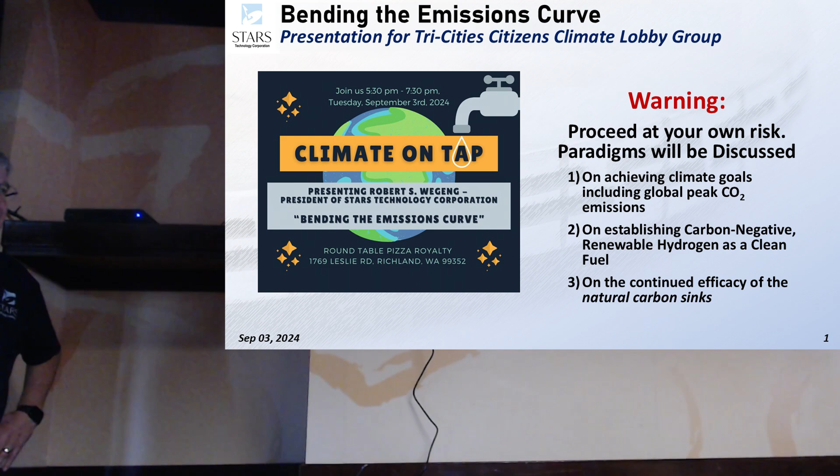Thanks very much. I commented earlier that I need to tell who I am now, so you'll know why I'm qualified to talk to you, so no one will ask the question at the end, why did you think you were qualified to come and talk? That would be embarrassing. But I'm saying that to say I want to have some fun with this talk. This is the third time I've talked to this group before. The first two times were before the pandemic.

Once it was at the Emerald of Siam. Some of you were here for that. The next time was at, was it called Paper Street or something like that? The Paper Street Brewery, the pub that was there. Yeah. So I gave another talk there too. This talk is a little different than those first two talks. At that time I was talking about clean energy from a conservative's perspective. Some of you know that I was a precinct committee officer in the Benton County Republican Party, and I may be one again next year, and then again it may not be. It may depend upon how some things go.

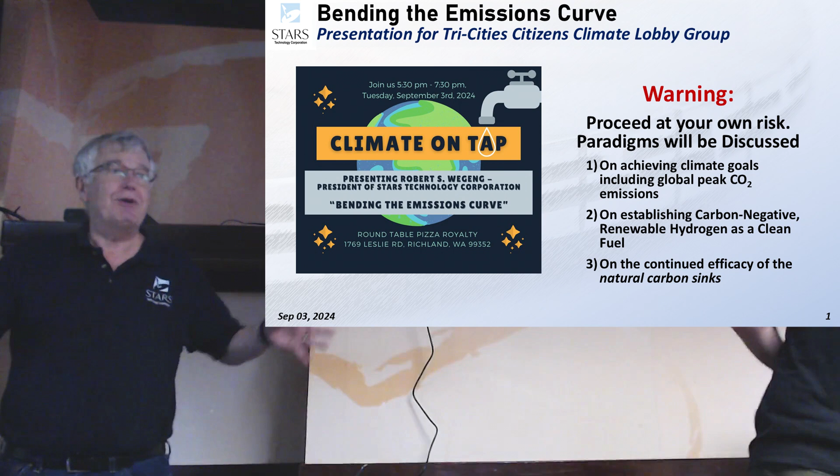I want to provide a warning. This is for mature audiences. This is not for people that are skittish or things like that. We may break some things during this presentation. We will definitely be talking about paradigms. We may break some paradigms. We may be dancing on top of the shards of some paradigms by the time we're done. Paradigms that are false need to be exposed so that we can make better decisions about how to do things. And developing paradigms that work so we can teach them also matters a lot too.

So to a large extent, this talk has to do with paradigms that relate to the next three things. One has to do with the title of this. When I was asked about a title, I said, how about bending the emissions curve? Because I kind of knew that I would want to talk about that. I also knew, because I'm with STARS, that I would want to talk about things STARS is doing on establishing carbon-negative renewable hydrogen as a clean fuel. That's related to paradigms too. And then the third thing I'm going to talk about is something that Steve and I have spent some time on: the continued efficacy of the natural carbon sinks. So I'm going to talk about all three of those things.

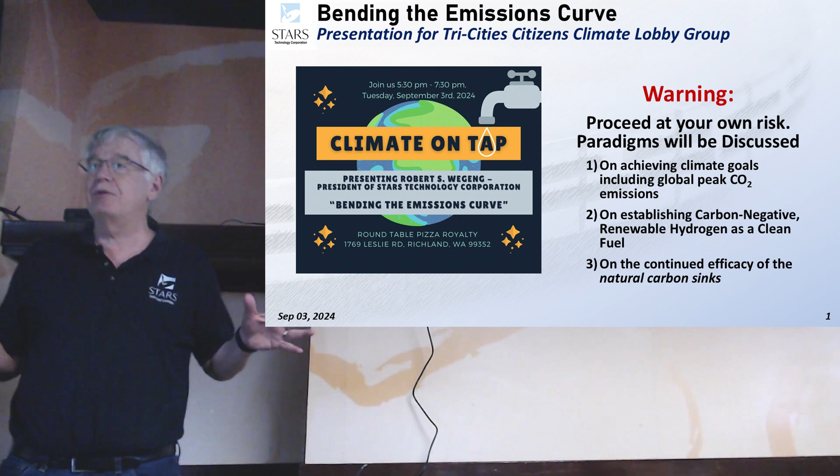And again, I hope to have a lot of fun. Hopefully, I will continue to occasionally make you laugh. Sometimes it'll be at me. Sometimes it'll be at things I say. Sometimes there might be stuff on this.

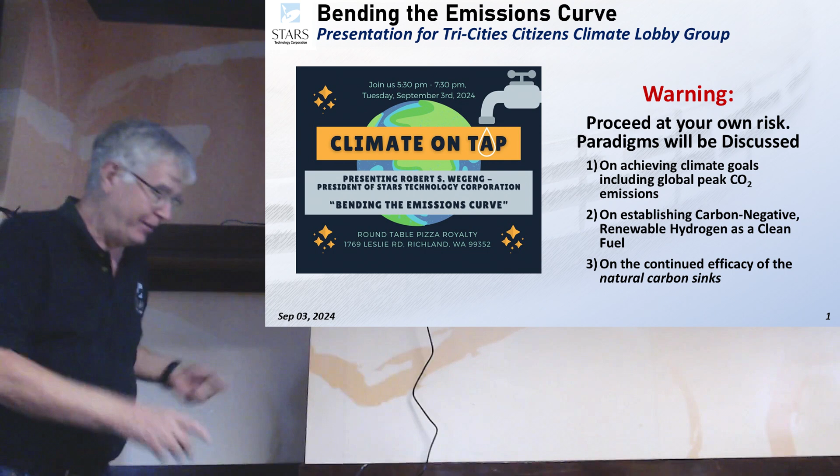But there will be an occasional item simply to remind me, oh, at this point, make sure you say this or make sure you say that. It may not be obvious to you that that's what it was for. I was asked earlier, if I had a hammer, did that mean that we were going to sing or that I was going to have music playing with this? And the answer is no. That was to remind me that I think of this group as an advocacy group.

I was born in the 1950s. I know who Peter, Paul, and Mary was. I think a few of you do too. You knew who they were.

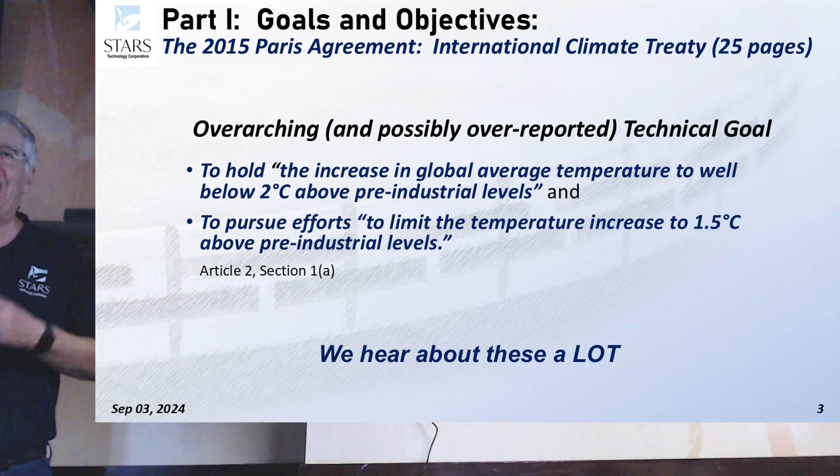So I now want to do a little preamble. Something about goals and objectives. I was an engineer for a long time, and projects for a long time, and organizations for a long time. I kind of like when somebody came up and said, you should have high-level goals and a series of objectives under them that you can measure so that you know when you attain the goal. The objectives should sum up to say, now I met that goal.

I like that approach. I view the temperature-related things in the Paris Agreement as being the high-level goals. And you guys probably know, my PDF copy of the Paris Agreement is 25 pages long. There are lots of words in it, but we only hear a little bit about some of them. So anyway, from about 2 or 3 pages in, there are 2 goals that we hear about often. I refer to these as overarching and possibly over-reported goals. The first one is to hold the increase in global temperature to well below 2 degrees C above pre-industrial levels. I would be amazed if people in this room didn't know about that goal.

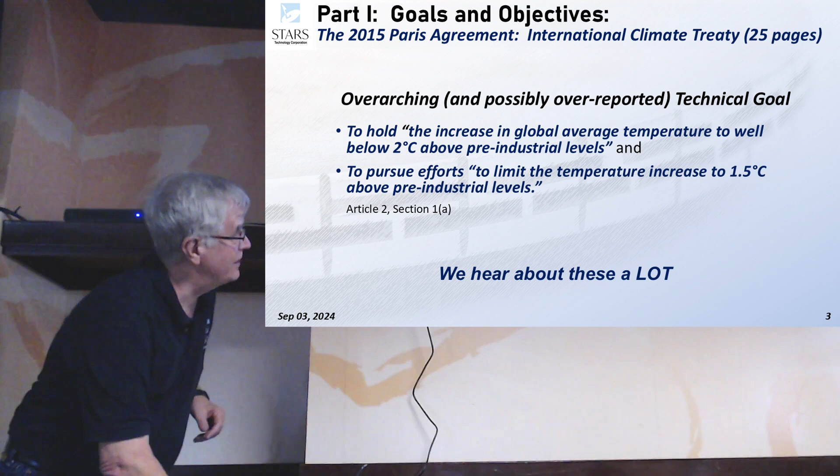I would be even more amazed if they didn't know about the second one, which is to pursue efforts to limit the temperature increase to just 1.5 degrees C above the pre-industrial levels. And again, I think this is over-reported to a certain extent. We see this practically every day. There's always going to be an article in the news or in the trade journal or something where they talk about our problems with accomplishing, particularly the 1.5 degree C goal.

And they often report that scientists have told us that at 1.5 degrees C, the Earth will start to experience irreversible climatic type events, which of course isn't really what climate scientists have told us. But it is the popular thing to talk about on the news, and it helps people continue to stay on the news stories so that they get to see the commercials that people paid to have put on the show. We hear about those a lot.

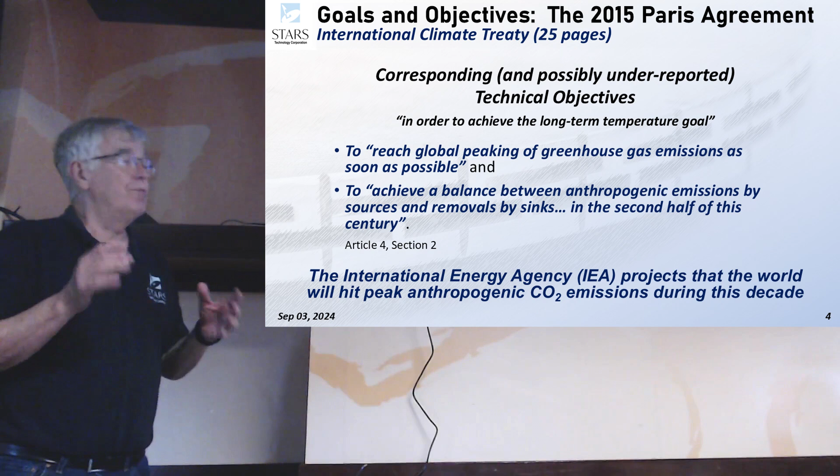But now I want to go to the objectives part, and this is where I think there's stuff that's really valuable, but possibly underreported. Technical objectives to achieve the long-term temperature goal. That's in the item, a couple of pages past those first. So 2 objectives. One is to reach global peaking of greenhouse gas emissions as soon as possible. I'll come back to that in a second. I want to bring up the second one. To achieve a balance between emissions by sources and removals by sinks in the second half of the century.

Now I said I'd like to see objectives that are measurable. It would be a little better if the first objective didn't simply say as soon as possible, but gave something more concrete so we could see how we're doing. And the second one, at least they gave a little bit more. They say in the second half of the century.

I wonder if the authors thought, will that be like in the last quarter of the century, after 2075? Will it be between 2050 and 2075? But they surely didn't think our goal is 2030, or our goal is 2040, when they wrote in the second half of the century. Roger, you asked me before, is there going to be good news? Maybe, on these points, maybe.

Now, I want to mention, I'm kind of jumping to the first item, this is like getting to the end of the story first. The International Energy Agency projects that the world will hit peak anthropogenic CO2 emissions during this decade, perhaps as soon as next year. Almost 3 years ago, they made that announcement. They said that the war in Europe put great pressure on energy replacements, and that has made a big difference in the production of renewable energy and other things too, so that they were now projecting, again almost 3 years ago, that we could hit this peak emissions, that's the first of those two underreported goals, perhaps this decade.

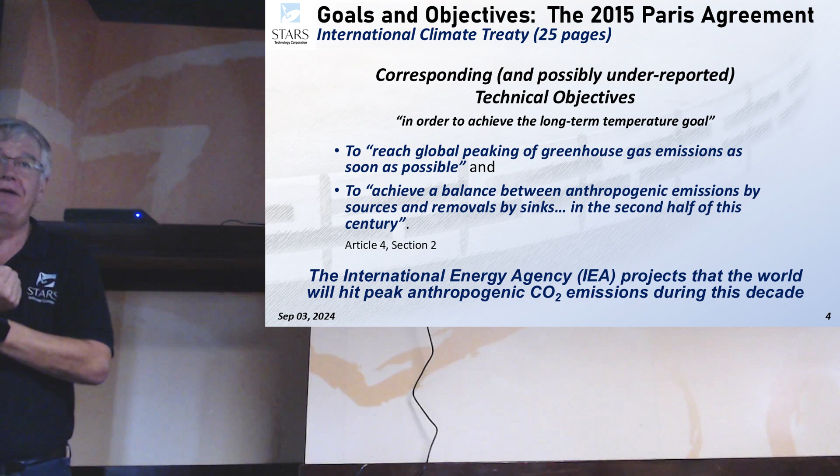I'm not talking about positrons and whether they go backwards in time like Richard Feynman suggested. I'm definitely not covering the many worlds view of quantum mechanics. And I'm not talking about who should be the next president. In fact, I've learned that I shouldn't be the one telling people who the next president should be. Important things like that should be communicated by my wife.

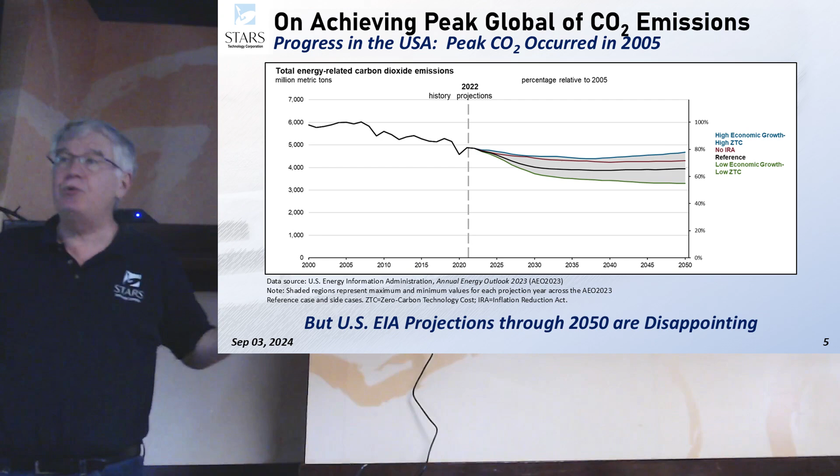But anyway, the IEA says that. So I want to talk about this for a couple of slides. Again, this is that first item about reaching peak CO2 emissions. Again, the good news from the IEA was that. I'll talk more about it in a moment. But first I want to say, what's the progress in the USA? Well, again, an underreported item is the USA hit peak CO2 emissions in 2005, maybe 2006, but the USA did it years ago. We've since shut down over 300 coal-fired power plants, over 300 coal mines.

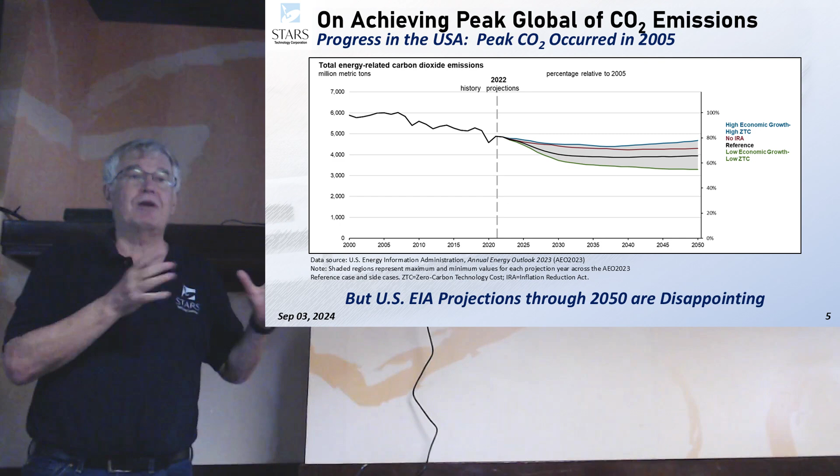We've done it through a combination of things that include shifting some power from coal to natural gas, that include solar and wind generators as well, that include some batteries in places too. But we have substantially reduced our CO2 emissions.

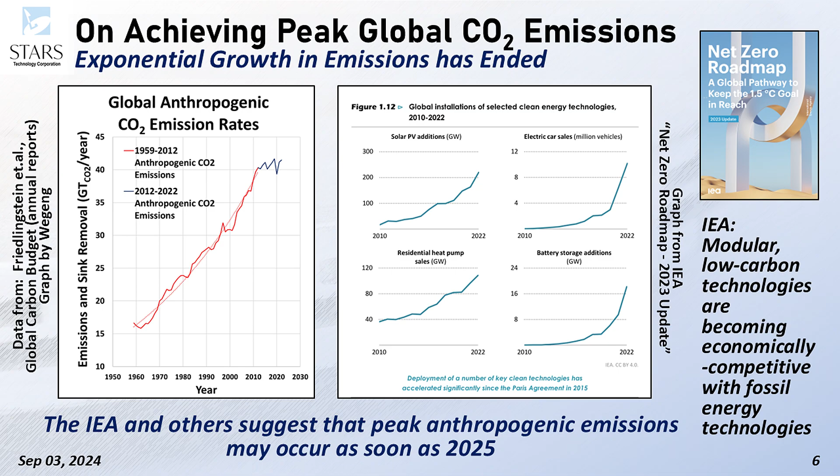We'll show that now. So this is what the Energy Information Administration from the US put in a chart about a year ago. This is from their Annual Energy Outlook 2023. I don't think they came out with one for 2024. When I looked for it today, I found a website that said, stay tuned next year. So they were saying, we'll have a 2025. I think maybe they didn't do it 2024. But this is the chart they produced. And it has what I was talking about.

In about 2005, we had peak CO2 emissions. And again, this is CO2, not CO2e, but CO2. And since then, it's been declining. Now, their projections a year ago in 2023 did not include things people talk about, which is, can we get to zero in 2050? They say they were confused about the Inflation Reduction Act and its provisions. So they have one scenario without it, they have a couple others, but they basically said stay tuned for the next time around for what we think that will do.

So, but I will certainly say, my comments on this is that their report certainly was disappointing. If we really want to get much greater emission reduction, they showed emission reduction slowing down. And we all know we can do better than that, and we know we need to do better than that. Price on carbon. That's one approach, but I would say there are other things too, and I'll talk about some of the others as well. Okay.

Yeah, don't be a heckler.

Now, worldwide, I said before that the IEA has said we think we can hit peak emissions during this decade. So now I put up a chart.

By the way, Mickey had said don't be too technical. So if this is too much, then please avert your eyes. Again, this is mature audiences only. But I produced this chart. There are only a couple of charts in this that I didn't produce. I'll just let you know. So that means it's not too technical. If it's not too technical for me, then you guys can handle it too.

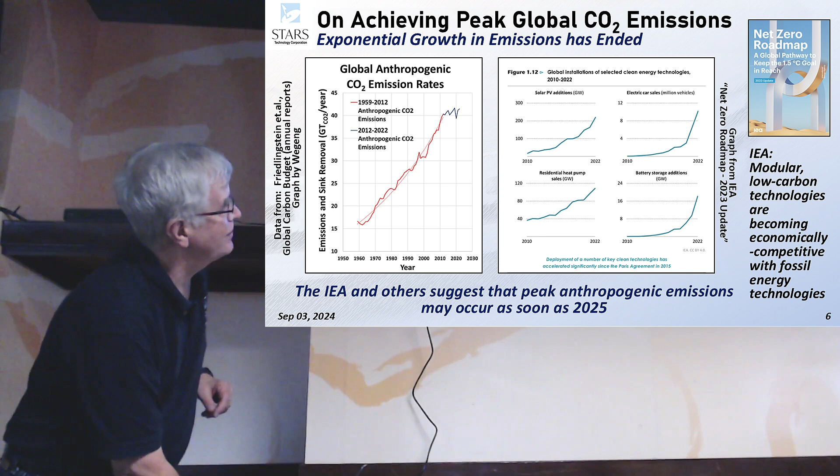This is battery storage. What they're basically saying is that modular systems mass-produced, as they achieve greater and greater mass production rates, get cheaper and cheaper. We knew that to be true already in the USA, but they're saying it's happening so that now we are getting modular low carbon technologies out there that are economically competitive with fossil energy technologies. Now, I think we all know that as they become cheaper than fossil energy technologies, people will tend to prefer the clean energy technologies instead. So that is a paradigm notion then from the IEA about how to reduce carbon emissions. We have to deliver technologies that are economically preferable and they cause emissions to fall.

And I want to make this point too. This is about paradigms. The world is departing from the IPCC, the UN's Intergovernmental Panel on Climate Change, from their business as usual scenario. And the stuff I've seen coming out of them as they prepare for their next round is a recognition that they need some other kind of standard, because we're not on a path now where we keep doing the exponential growth up. Hopefully we don't take it again.

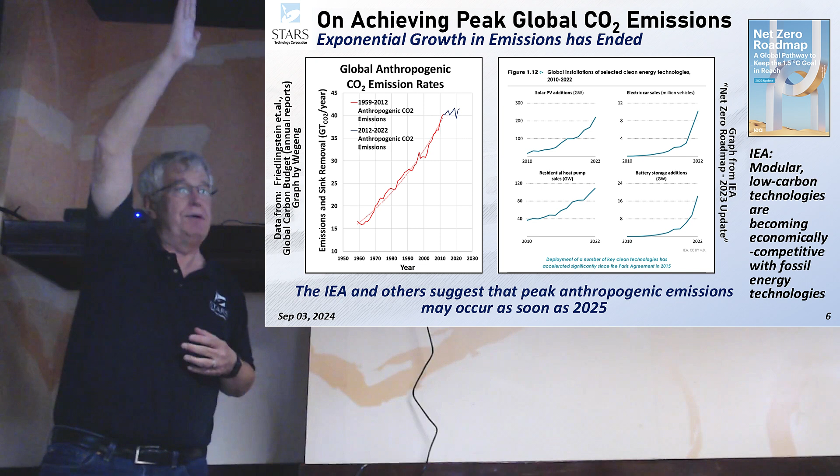But if we're not on that path, then we don't need to be comparing ourselves to scenarios where we're at 1,000 parts per million in the atmosphere or 1,200 parts per million in the atmosphere. Instead, we're on a path where we could definitely go less. And by the way, it's up to us to make sure that happens. So while, Roger, there's good news in this talk, the bad news is it's still up to us. We still have to work.

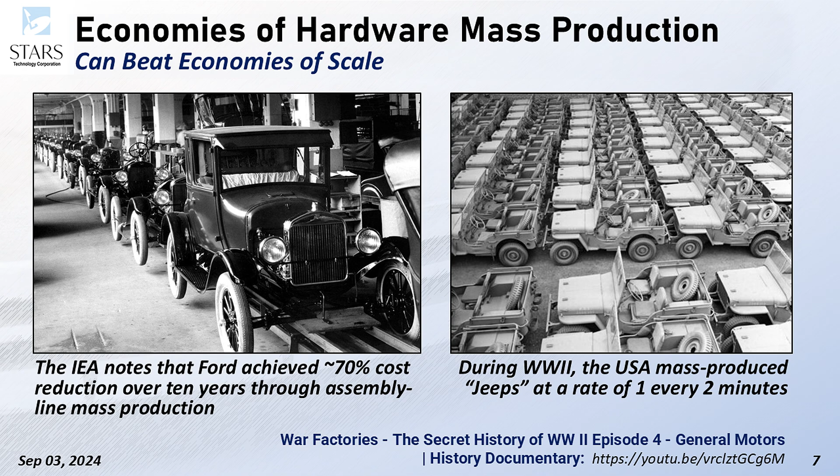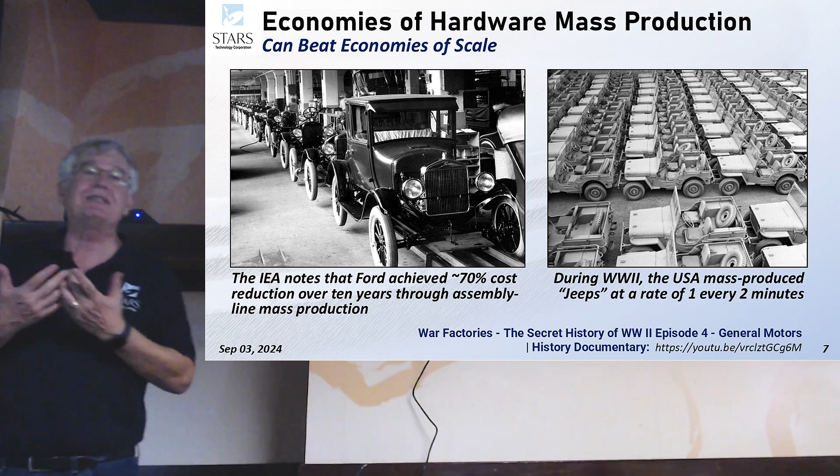Now, I wanted to say something about mass production. You guys remember there's a question at the end. I'm not going to tell you the answer anymore. It might have to do with this. So I'm going to show first Henry Ford's mass production. As a mechanical engineer, I studied that. And it fascinated me that over actually about 2 decades, Henry Ford transforms transportation in the USA immensely.

Well, anyway, so the IEA pointed out that Ford achieved 70% cost reduction over 10 years through assembly line mass production. But Ford started off, as the subtitle says, saying, I want to do a mass-produced automobile. When Ford began, everyone knew that only a rich man could afford a car. They were thousands of dollars each, and that's the start of the 20th century when $1,000 was a whole lot of money. Ford said, if I can design a car for mass production and get the much better efficiency of labor through things like assembly lines, then the average family will be able to afford a car.

This is part of why, and I showed these pictures, like a comedian, I don't want to tell the same jokes all over again. I showed these pictures a couple of talks ago. New York City in 1903, it was Easter Sunday, black and white photos. It's hard to find the car in the photo. It's loaded with horses and buggies. 10 years later, same place. It's loaded with cars. It's hard to find the horse. That only occurred because in that 10-year period, it went to a circumstance where if you owned a horse and it was time to replace your horse, you were economically better off to get a car.

We want to think that way, by having clean energy technologies that are better solutions than the fossil energy technologies. We change the planet whether the planet wants to change or not. Workers were able to buy the cars they were making. Yeah. So now, this one, I like this one a lot. This is from World War II. In World War II, the USA mass-produced Jeeps at the rate of 1 every 2 minutes. They came out of the factories in the crates, ready to be put on ships and taken to Europe.

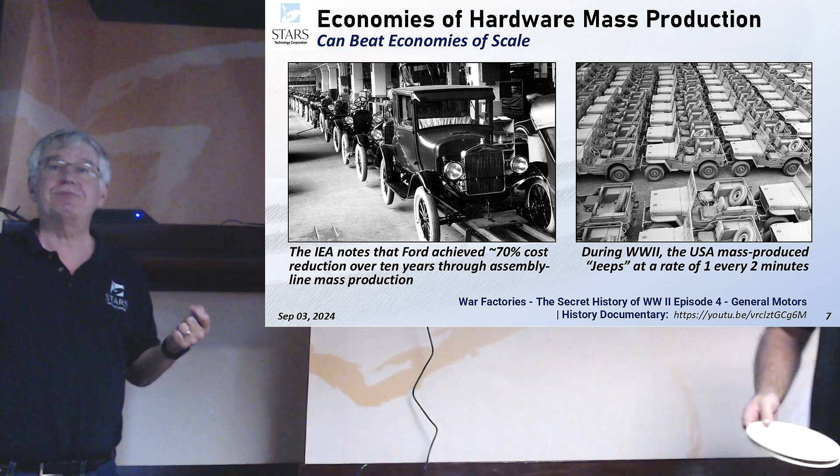There's a really great YouTube video. I put it here at the bottom. It's part of a series on how America's manufacturing might won World War II. And it talks about how we changed out things in Detroit and elsewhere. How they changed out assembly lines for mass production, and how they changed the design of things like machine guns and, well, not so much jeeps, I think jeeps were new then, tanks and that sort of thing. So they could mass produce them and get them into Europe and train mechanics so that we could be servicing them in Europe as well.

It was a major part, and it's a really great set of YouTube videos, but the one on General Motors is the one which will show you the Jeeps. I really like the bit about the Jeeps. So now I want to segue. I said I'm going to talk about three things. That first part was about bending the emissions curve and what the IEA had to say about that. Now I'm going to talk a little bit about STARS.

How long have I been talking? 25 minutes. What? 25 minutes? Oh, okay, so I'll be done in about 3, right?

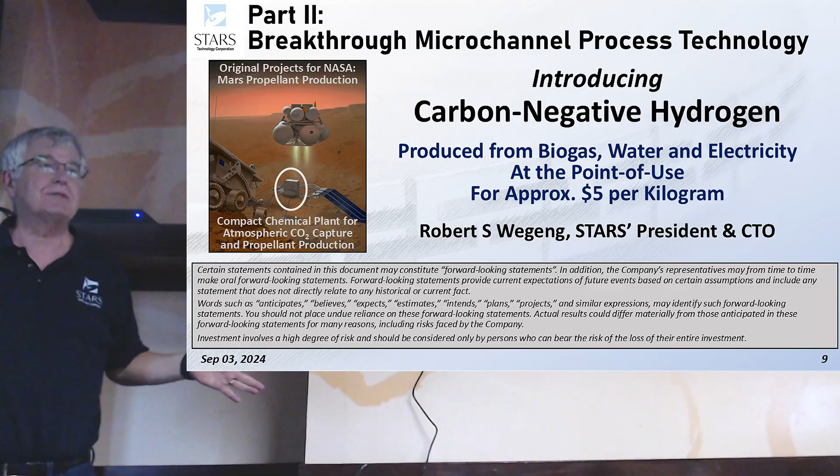The next 15 slides are really fast. Okay, so now this is kind of like the talk within the talk. And I've got the disclaimer here. This is whenever I give a talk for STARS, in case somebody in the audience gets so enthralled they want to make an investment, I have to put something in here that says, you do these things at your own risk, you listen to me at your own risk.

But I'm going to be talking about what STARS is doing to produce carbon negative hydrogen from biogas, renewable natural gas, water, and electricity at a low cost. And we are using, as I mentioned before, technology that I and others were developing at PNNL going back 30 years now. It's hard to imagine that we've been working on that long.

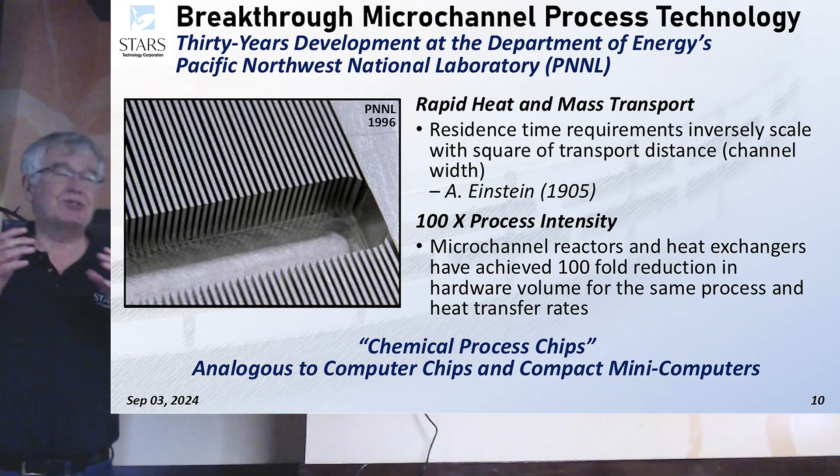Microchannel reactors and heat exchangers and separators are extremely process intensive. It allows us to increase the heat transfer rates per unit volume by a factor of 100 compared to conventional technologies. Chemical process units that are heat or mass transfer limited therefore can be shrunk in size by a factor of 100 with the same production rates.

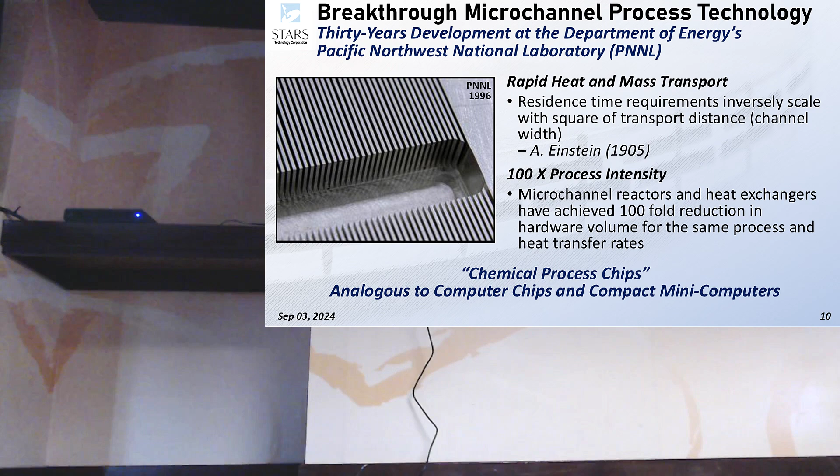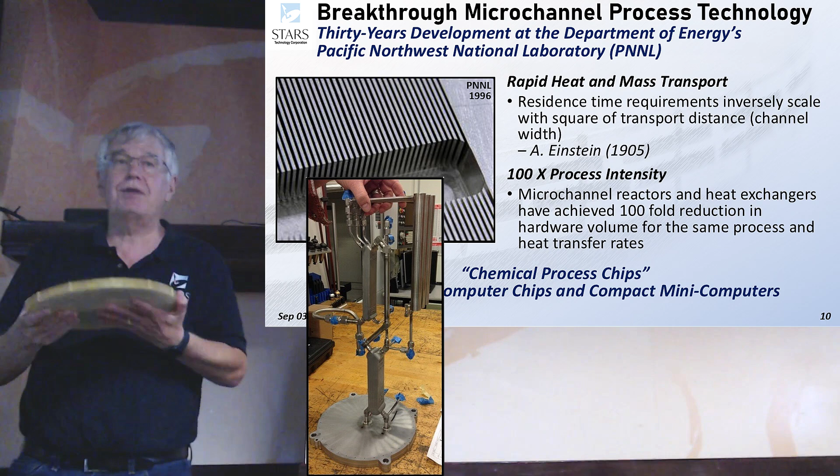So for example, Dennis, didn't you bring, yeah, this is a plastic model of one of the reactors that we're doing. I'll show you the reactors in a minute. But this is actual size. It's a little less than an inch thick and about 11 inches in diameter. For the hydrogen production productivity we get from this, to do the same thing with conventional technologies, it would have to be 8 feet tall.

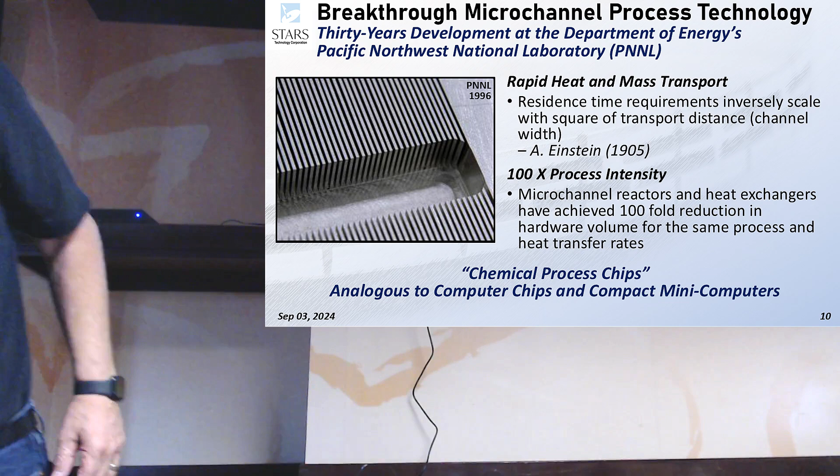That's light. I had to bring this because it's light. The metal reactors are actually kind of heavy also, and my back doesn't like that for me to do these steps with that. But there's no way we could carry that in. We would need more than a forklift to bring something that large in. Being able to mass produce these things makes a big difference.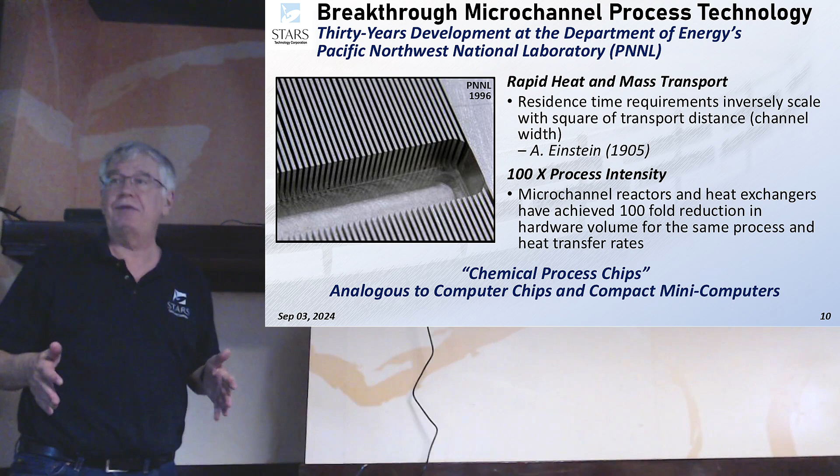So we get 100-fold process intensity within these size devices. We refer to them as chemical process chips. They're analogous to computer chips. Again, you make the components inside smaller, and you get much higher productivity out of it, including sometimes substantially better efficiency as well.

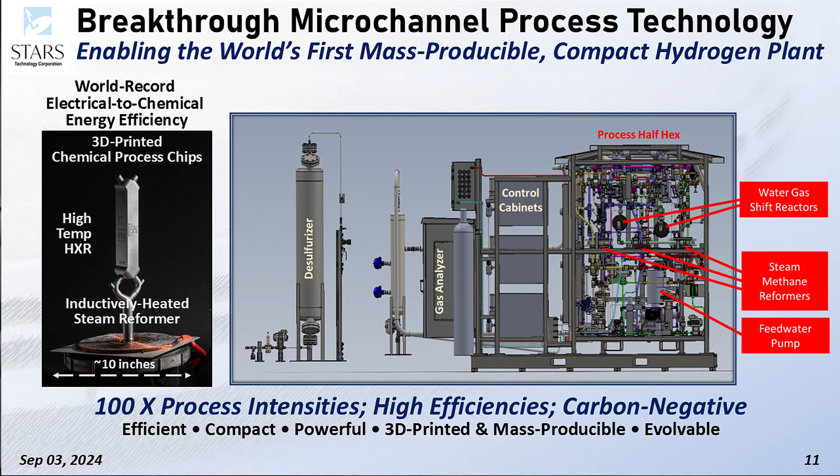This is the SolidWorks model of what we built and have operating. I'll show pictures of it in a moment. But this is one of the actual reactors, about 10 inches in diameter in this case. We're inductively heating them. If you think about the new induction cooktop stoves, where you can put a metal pot on and heat from under a ceramic, we put copper coils on each side in order to provide the heat for the endothermic steam reforming reaction.

Normally, industry would have to burn a fuel to do that, and there's CO2 from that. We don't have to burn a fuel to do that. In fact, we're considerably more efficient at providing the heat for the reaction because of this nature.

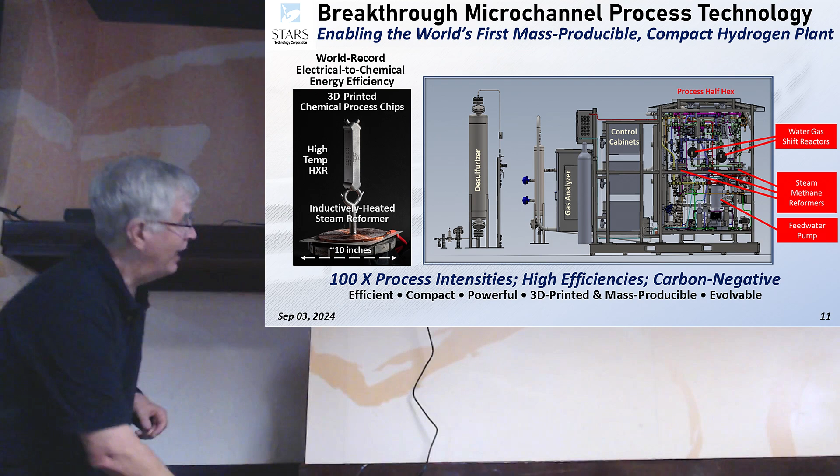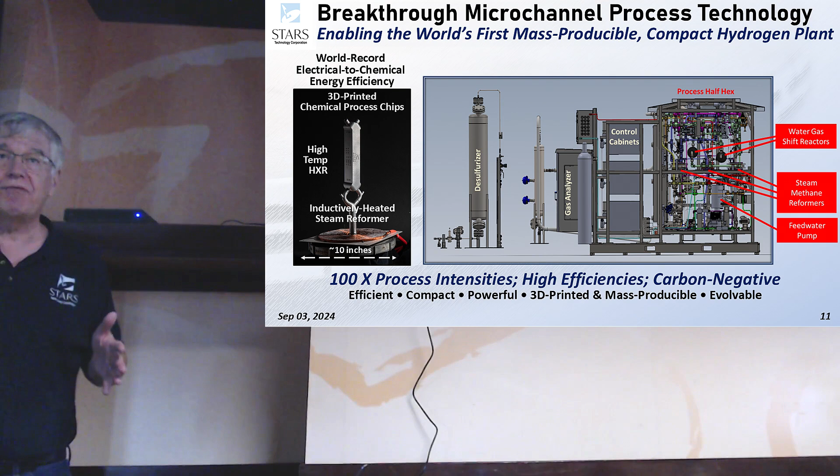And this also shows a microchannel heat exchanger. Dennis, you got one of those too. Why don't you just hold it up? That's the same size as the unit there. So think of that entire system as being about this tall. And you can put a lot of them together. So if I said I'm going to take the table over here, setting them side by side, obviously I could get 8 or 10 of them on that table, and therefore be ganging up to do high volumes of mass production of hydrogen near where I need the hydrogen.

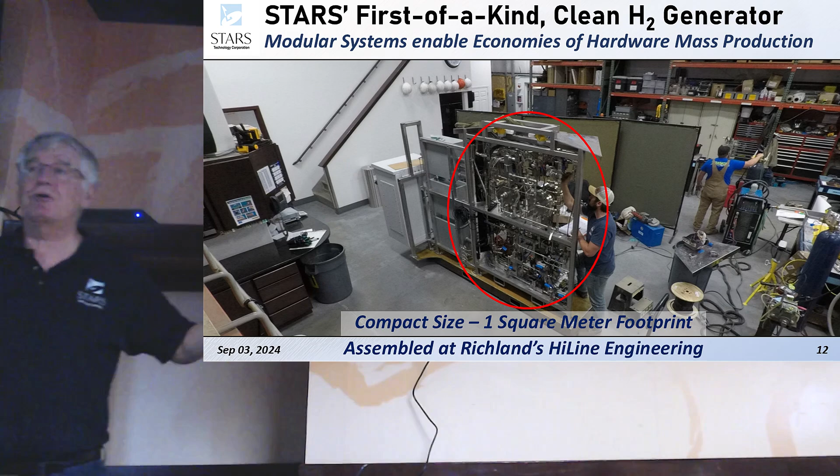I'm not going to talk through these details because I'm just going to go right onto the picture. So the chemical process unit is a footprint of about 1 square meter. It's got 3 of those reactors side by side, other heat exchangers and other reactors in it too, a pump, valves, other instruments, etc. So this is a unit a little bit bigger probably than the refrigerator in your house, which means we can mass produce them, put them on wheels, and move them through an assembly line.

Normally, chemical engineers use economy of scale to get low cost. So they build something a lot bigger than this building in order to get to low cost.

We get to low capital costs by mass producing the hardware, just like Henry Ford's automobiles, just like those Jeeps, just like flat panel displays, just like a lot of other things too. We get to low capital costs that way instead. So this is consistent with the IEA's observation that modular, mass-producible clean technologies will be able to beat out the older economy of scale-based fossil energy technologies.

We've been working this for years. We were delighted that the IEA is a great front man for us, saying this is how you do it. And by the way, this was assembled. This picture was at HiLine Engineering near the Richland Airport.

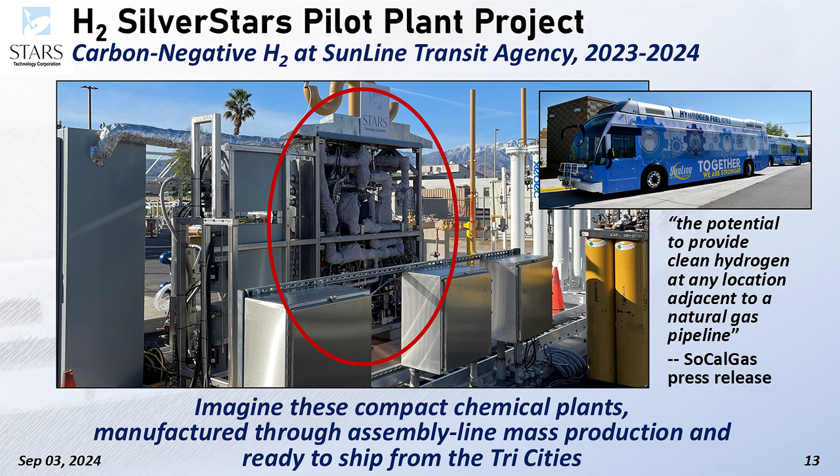So here is the system down in Southern California in Palm Springs at Sunline Transit. Our partners on this include Sunline Transit, HiLine obviously, also Southern California Gas Company. They're mentioned over here. They are the nation's largest natural gas distribution utility. They've got about 20 million customers. They paid a lot of the cost for this demonstration. We paid some of it too.

Sunline Transit has about 30 buses now, Dennis? 26, I was close. 26 buses. Well, I got one of my props here. I can change it to 30.

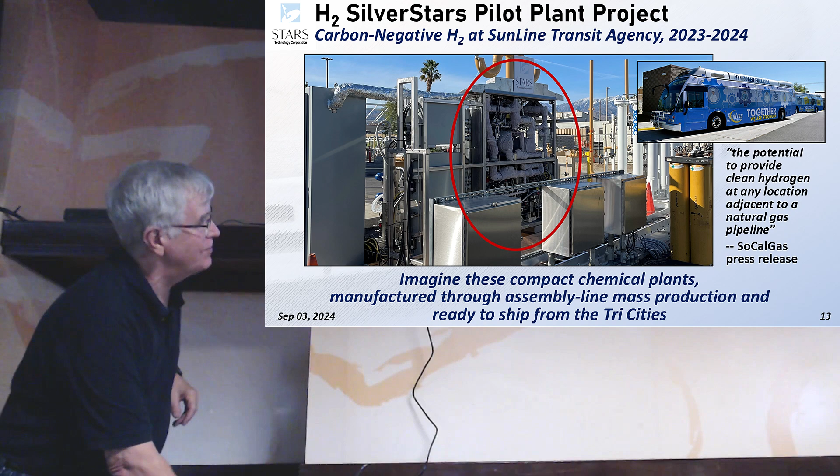But anyway, the real point is that's the unit there. There are other peripheral items too. At the unveiling ceremony a year and a half ago, the vice president from SoCalGas made some comments, and some got turned into a press release. They talk about the potential to provide clean hydrogen at any location adjacent to a natural gas pipeline.

We use renewable natural gas brought through the pipeline. So that means it comes from farms, from anaerobic digesters and elsewhere. It's stuff that would have gone up into the atmosphere. Methane, we know, is a super greenhouse gas. Converting it to hydrogen and CO2 reduces the greenhouse gas potential. A GREET assessment, if you don't know what it is, I don't have quite the time to explain it, but a GREET assessment performed on this makes it carbon negative.

California scores all the compressed natural gas at the 300 plus filling stations they have for CNG. All of them, they score them as roughly minus 100 grams of CO2e per megajoule because they are using renewable natural gas, again, sourced from anaerobic digesters, landfills, manure pits and agricultural sites, etc. It's a wonderful thing that's happening.

And by the way, I didn't look it up. I should have looked it up today. Last time I looked it up, the price of that renewable natural gas at those filling stations was something like $2.30 per gallon gasoline equivalent. California's about $5.00 a gallon for real gasoline. So you don't get that kind of price unless everybody in that value chain is making money. You don't get 300 stations all getting that unless people are running around saying, where is the next place I can go source renewable natural gas? It's a wonderful surprise that it's that way.

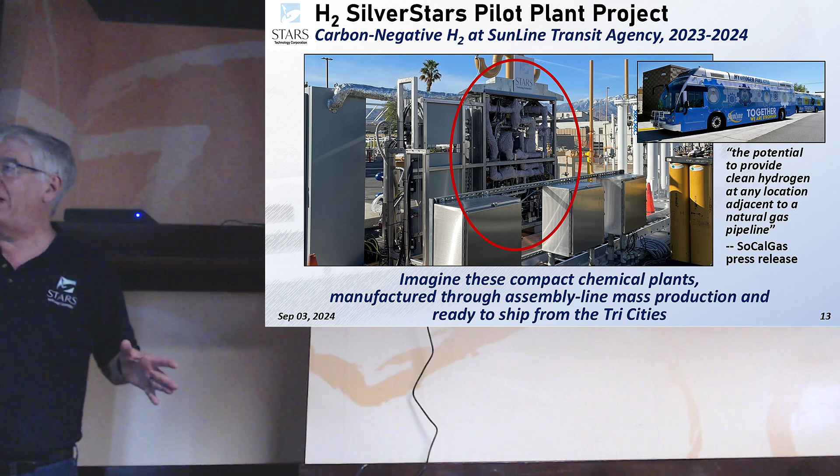But I want you to imagine these chemical plants, again, the size of a refrigerator, or twice a refrigerator, manufactured through assembly line mass production, again on wheels, shipping from the Tri-Cities. We can put them in crates just like those Jeeps, ship them all over the USA, all over North America, really all over the world. Basically, we can flood the world with affordable clean energy technologies from biogas for hydrogen. That's part of where we're going with all of this.

And again, if you all want to throw in money into this, that's fine, but don't pay any attention to me. It's at your own risk.

But I want to also say a little bit about the architecture. So where would we ship them? It's a question I'm supposed to ask that goes with this one. And again, if we're going to be the equivalent of about $5 per gallon of gasoline for the hydrogen initially, well, distributed hydrogen production is enabled by this approach. We can put them at the filling stations. Again, with the natural gas grid nearby, we can make hydrogen near to that. This is for both transportation and distributed electrical power generation.

If you know about the regional hydrogen hubs, I'll show you something in a moment on that, but this can help fill out and connect the hubs around the country that are being set up. Again, delivering the renewable natural gas through the gas grid gets us to carbon negative hydrogen. And we believe we can have these units in mass production in about 18 months.

And then this shows you where we're leading to. So by the way, you guys will recognize this is the Northwest. The darker counties are the ones that have the most biomass. The lighter ones have less biomass. We're showing with the red lines where the current natural gas transmission lines are, the high pressure transmission lines across the country. The little white dots are communities.

They don't show up very well from my angle. Okay, the yellow lines are major highways. By coincidence, communities and natural gas lines tend to go near highways. They all seem to be on the highways. And in addition, I'll say that the blue circles are the places in the Pacific Northwest hydrogen proposal for where they said they would put some electrolyzers.

So we're saying distributed production departs from the classical paradigm of central chemical processing. It offers this new paradigm for distributed processing. And we believe it's the fastest approach to building a clean, affordable hydrogen grid.

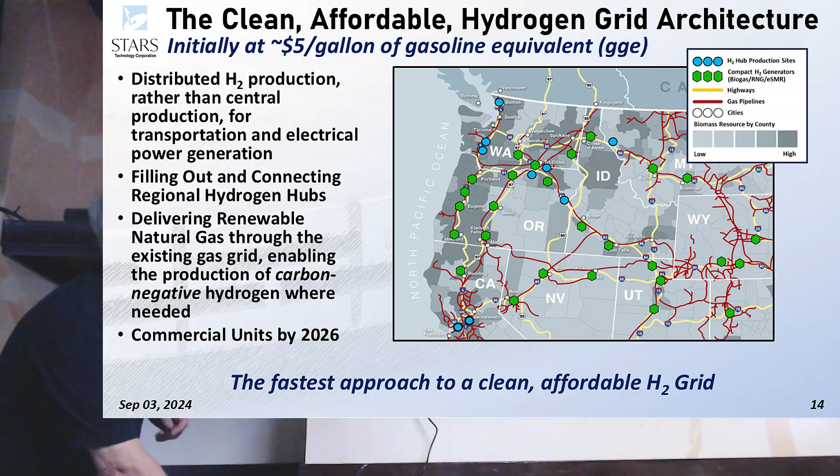So is it only focused at the transportation sector right now, or will we be focusing on industrial use? So that's a binary thing. I'm going to say we're not focused on just one, but what I will say is the problem right now in California of about 20,000 vehicles that can't get affordable hydrogen creates an opportunity. In the Northwest, we don't have those vehicles. If I start placing these all over the Northwest next week, nobody's going to them because they don't have the vehicles. If I solve the problem in California first, then the company gets the cash to build out and do much more. But it's not just transportation, I mentioned, it's also electrical power generation.

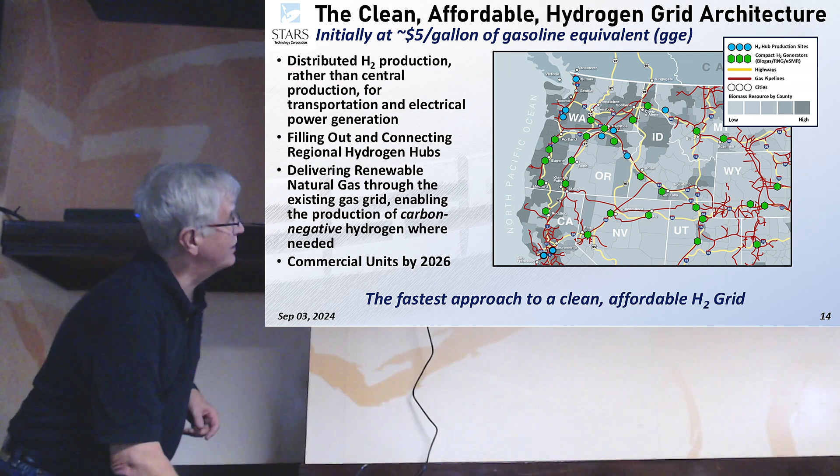So if we think about the need for more power generation, for energy storage, to support the grid as we build up more solar and wind, that's intermittent. Placing these units, which use electricity, remember, I'm using electrical heat to help run these reactors. Placing these units that use electricity to make hydrogen at the communities where there is already an electrical distribution grid allows me to also produce power to back up the intermittent wind and solar, power at a low cost. So to me, it's really kind of starting with both of them as a focus, but later it will also be industry and some other things.

So how does the cost of your way of producing hydrogen compare with production by photolysis or by electrolysis? Yeah. I do have a chart like that, but I didn't put it in this slide set. So you're going to have to ask me back. Okay. No. But I'm going to preview the answer. We believe when our units are mass produced, it costs about $3 per kilogram. That's per gallon of gasoline equivalent because a kilogram of hydrogen has about the same energy content as a gallon of gas. We think it'll cost about $3 per kilogram, plus or minus 10%, to be making the hydrogen. If you do it with water electrolysis today without subsidies, you're in the neighborhood of $7 to $10 per kilogram for the production of that.

Well, Dennis at Sunline, the director of Sunline told me they're paying $21 per kilogram down there with the electrical costs in California. Oh, right. So I'm thinking the Northwest is cheaper, but in California, they've got an electrolysis unit at Sunline. And they were quick to say, yes, bring this demo down there because they would really rather have much cheaper hydrogen.

But that cost includes when there's a surplus of energy, in other words, it would normally be exported. I was going to say, because the energy is exported, are you talking about the cost in the Northwest? Well, the electricity supply, yeah, in other words, when you said you were using electricity, when the dams basically during spring have, I don't know how the price is. In our case, we were simply using the average price of electricity over the year for a region. That's what we were doing for our model. And we do the same thing when we work electrolysis and others.

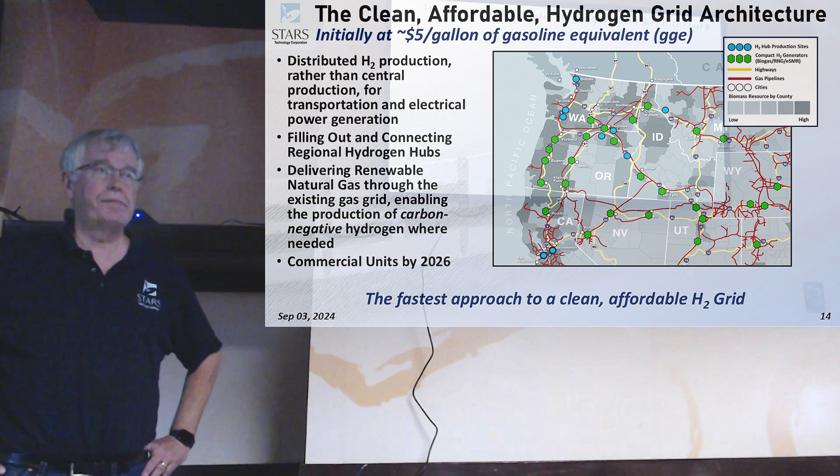Can I add one more thing here, Bob? I understand there's about a 3,000 acre photovoltaic farm going in somewhere out in Hanford. And when that happens, there's going to be a whole lot more power when we don't need it. Transportation would be our focus normally, because that's where the demand is right now. But here in our community, a great application is using that surplus power to make hydrogen and then bring it back on the grid when the sun's going down. Storage, yeah, energy storage, later in the day. It's a battery source, yeah, it's storage.

So now, just a few more slides. I want to now segue to that third item. I'm going to talk about the natural carbon sinks. I'm talking about the biomass on land as one category of carbon sink, and the ocean, dissolution of CO2 in the ocean, and all the things that happen then, as the other category of carbon sinks.

And now I've got one of those little things there that you wouldn't have noticed otherwise. This is to remind me to mention Steve. So Steve has been working with me on this, providing advice and doing his own parts of it as well. I put this up because I just thought I'd be so embarrassed if I didn't mention it.

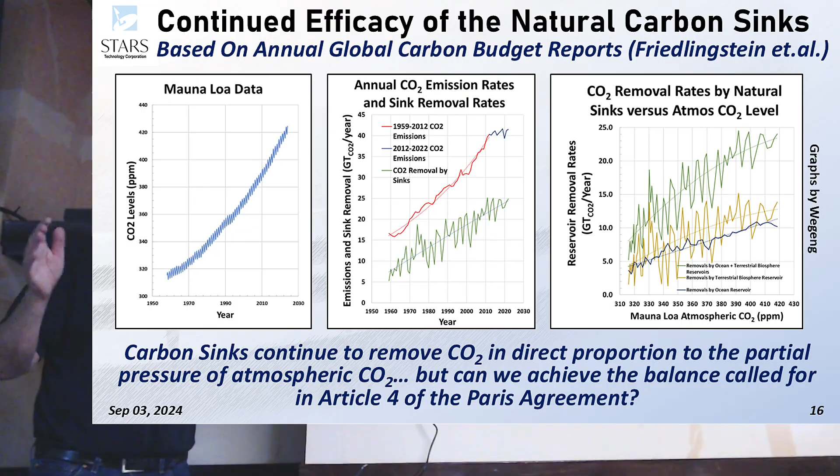So I want to talk about the continued efficacy of the natural carbon sinks. And I'm going to base a lot of this on the information from papers that about 110 authors do every year on the global carbon budget, really looking at CO2 and carbon throughout the entire planet, sources and sinks, etc. Friedlingstein is the lead author on that nowadays. But by the way, this first one is not from his. This is from the Mauna Loa data.

And again, I produced this chart myself, proving that I can use Excel to make charts. So this is CO2 levels as they've increased from when they first started in Mauna Loa taking the data, up till nearly today. And as many of you know already, it's a sinusoidal wave. During the winter, the numbers are generally going up, but in the spring, starting in the northern hemisphere, it starts to come back down. In summer and spring it's coming down, and then as the biomass falls back asleep in the fall, the pulling out from the land decreases again, and the numbers go back up.

In recent years, CO2 parts per million in the atmosphere overall has been increasing at about 2 to 2.5 parts per million per year, a little less than the 2.5. I put this up just to show you that, just like we saw exponential growth for years on CO2 emissions, we were seeing a curve up as well.

Now this was that emission curve I showed you before. But now this is the total uptake from the atmosphere according to the global carbon reports, each year during the same time period. And you can see that this is typically equal to a little bit more than half of the emissions in each year. CO2 uptake, whether it's for land biomass or for the ocean, is directly proportional to the partial pressure of CO2 in the atmosphere. As the parts per million go up, the intake from the sinks goes up as well.

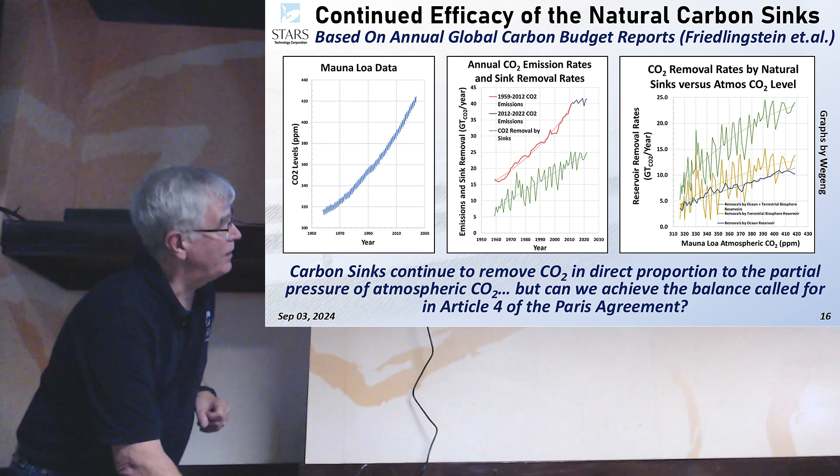But I'm putting all this up to say that over time, what we're really seeing is that the combination of land biomass and oceans have continued to pull CO2 out of the atmosphere at a rate that makes it about 54% of what was put into the atmosphere each year. We shouldn't say that's the equation. It's really based on the partial pressure difference between what's in the ocean or the land and what's in the atmosphere. But it's about 54%, and it's been that way for a long time.

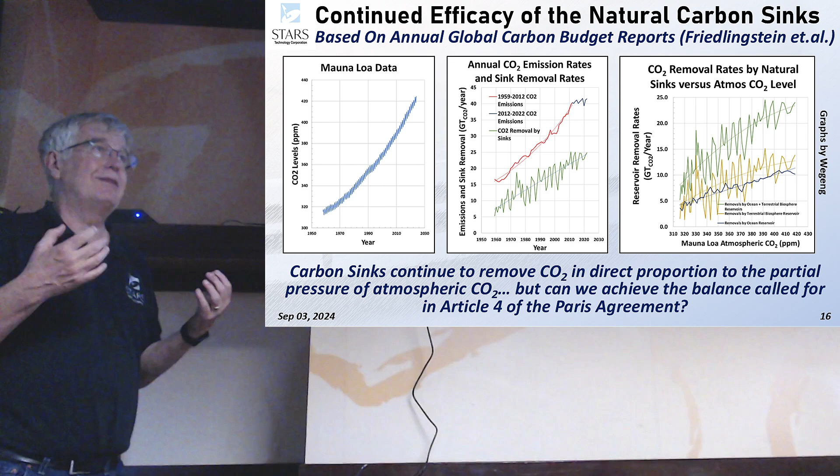So what we know from this is that the biosink and the ocean sink have both remained very strong. There was a period of time 25 years ago when the scientists thought these might be degrading. Then they recovered. They think they understand why now, but they are still very strong items. And we're looking at really...